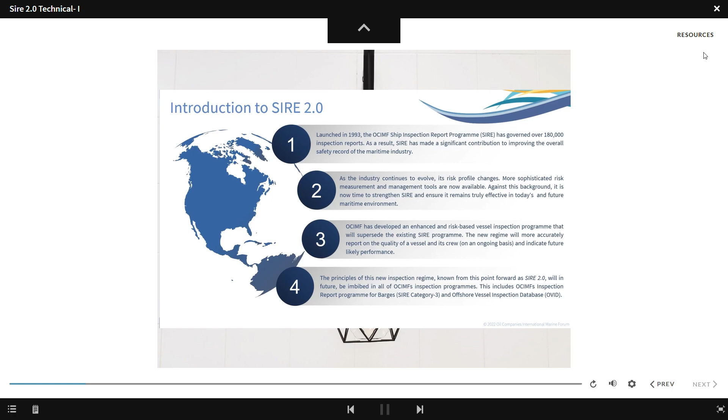OCIMF has developed an enhanced risk-based vessel inspection program, SIRE 2.0, that will replace the existing SIRE program. SIRE 2.0 inspections will provide OCIMF members and program recipients with more accurate information to enable them to make better judgments on quality and likely future performance of a vessel. Over time, the principles of SIRE 2.0 will be introduced in all of OCIMF's inspection programs, including the inspection program for barges, SIRE CAT 3, and the program for offshore vessels, the Offshore Vessel Inspection Database, OVID.

In this module, we will explain the reasons behind the need for change from the existing VIQ 7 inspections to the SIRE 2.0 system. This will bring about the step change that we hope will push the industry towards OCIMF's vision of an industry that causes no harm to people or the environment. We will discuss the 4 key areas of focus and the goal of an enhanced and risk-based vessel inspection program. A brief overview of the SIRE 2.0 question set, as well as a review of the inspection process, will be provided towards the end of this video.

The need for change between VIQ 7 and SIRE 2.0 was influenced by the following factors. 1. Feedback from the industry relating to the effectiveness of the SIRE VIQ 7 program. 2. Many of the questions within the existing VIQ 7 related to hardware. 3. Causes of incidents were not always related to hardware, but to human interaction with the hardware. The human element aspect of SIRE 2.0 will be covered in more detail in their respective modules.

4. Concerns were identified under the VIQ 7 process that it contains too many questions, and that questions were not targeted or focused on specific higher risk areas. Often questions in a VIQ 7 inspection were not completed accurately, and too many were answered as not applicable. 5. Critical operations were not able to be given repeatable coverage. Time management was not always consistent, with some inspectors completing an inspection in 6 hours and some in 14 hours on vessels of a comparable size.

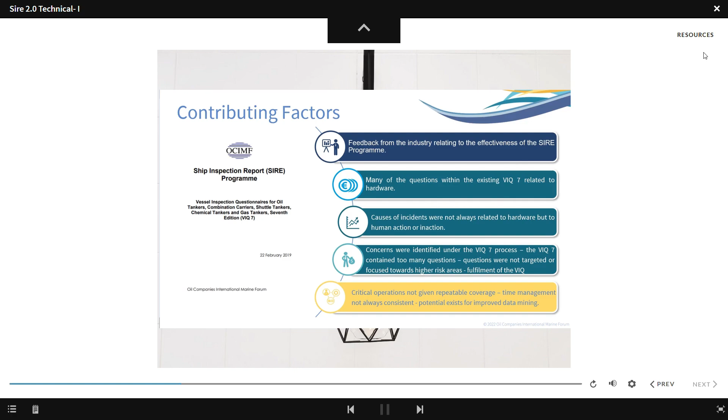SIRE 2.0, a step change. As we mentioned earlier, SIRE was launched in 1993 and has governed over 180,000 inspection reports. As a result, SIRE has made a significant contribution to improving the overall safety record of our industry and has received industry-wide acceptance and participation by OCIMF members, program recipients, and by ship operators. The current SIRE inspection program has concentrated on facilities, equipment, and management systems.

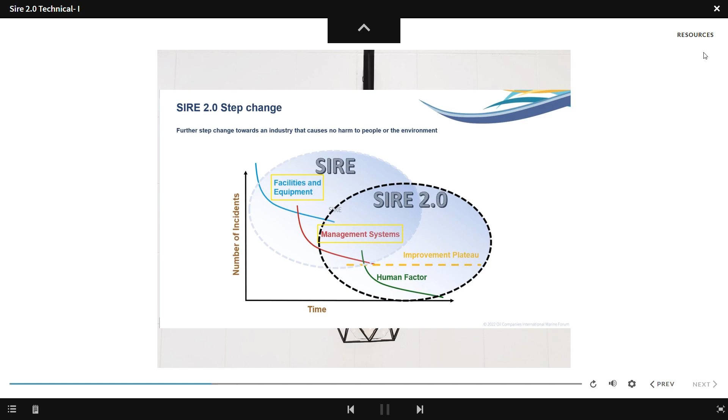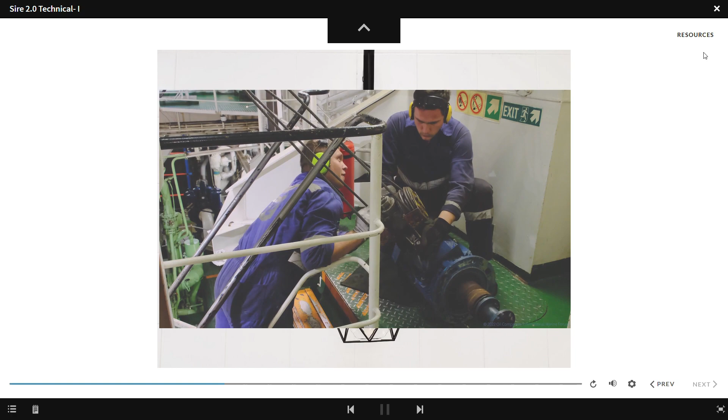SIRE 2.0 introduces a third element to the inspection program: human factors. As you progress through these modules, you will see that human factors is identified as a significant root cause of incidents, and going forward with SIRE 2.0, this will be an element that is identified within observations, along with hardware and process aspects. OCIMF's vision is that this addition of human factors in all its activities will further improve safety and reduce incidents. Let's look at the need for this change.

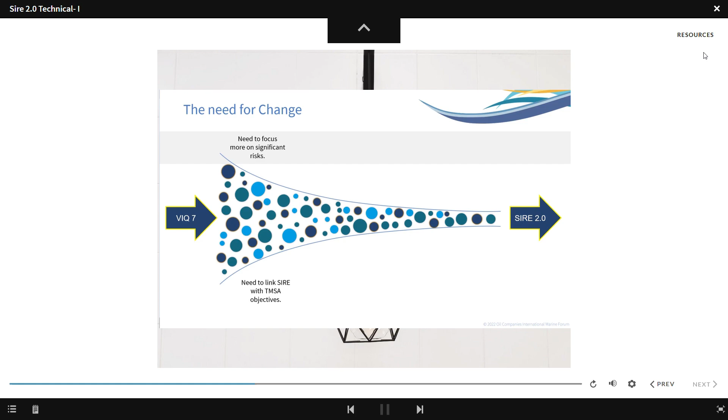In this transition from VIQ 7 to SIRE 2.0, the following key areas were identified and will be addressed, with the aim of an overall reduction in the number of incidents. 1. The need to focus more on significant risks. 2. The need to link SIRE with TMSA objectives and KPIs. 3. The need to respond to technological and regulatory changes. 4. The need to streamline the overall process. 5. The need for inclusion of human factors in the risk-based approach. 6. The need to enhance governance control. These changes will be delivered via the SIRE 2.0 inspection program.

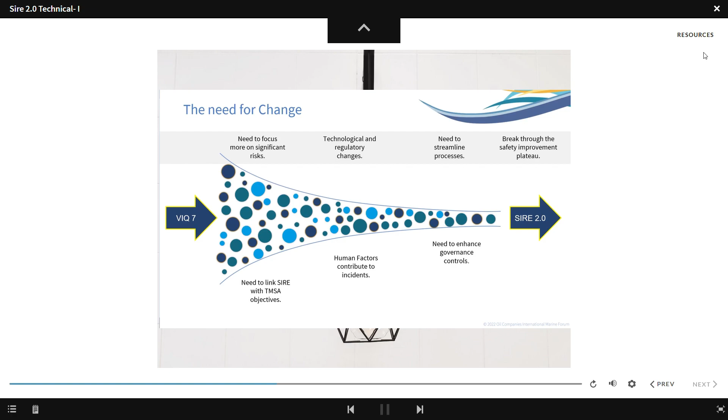The strategic goals and objectives that the SIRE 2.0 program aims to deliver on are identified by the following 4 key focus areas. Accuracy: facilitating an accurate description of how key safety and operational risks are managed and verified on board a vessel. Capability: the training and development of inspectors who are of the highest quality, consistency and integrity. Reliability: a strengthening of vessel inspections and reducing the number of repeat inspections required.

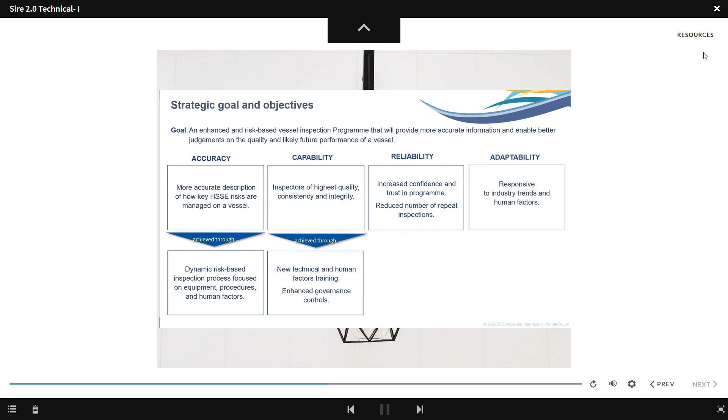Adaptability. A more rapid response to human factors, industry changes, regulatory framework updates, and technology advances. So how are we going to achieve these goals? Enhanced inspection criteria on equipment, procedures, and human factors to further improve control over vessel safety systems and processes. Enhanced pre-inspection processes and more robust monitoring protocols on the inspection process will be included.

Significant enhancements to training and continuing development of inspectors to ensure the highest standard of delivery is maintained and improved. A more comprehensive inspection regime with enhanced tools, strengthened governance processes, and more in-depth reporting outcomes following a risk-based approach. Updated policies, procedures, and user guidance housed in an online process documentation library.

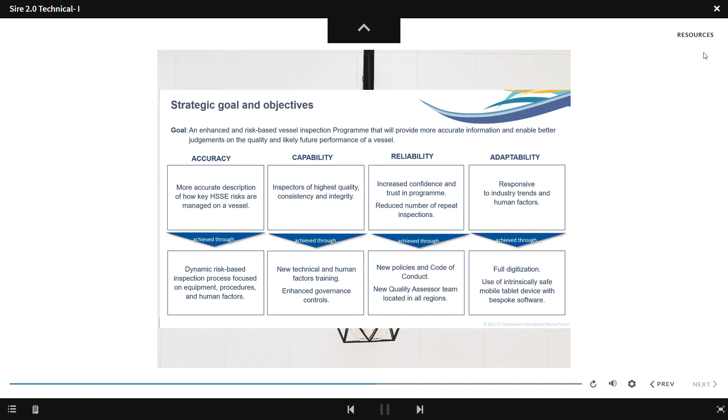An enhanced governance process to provide greater transparency and control for all parties involved in the program, either directly or indirectly, and the adoption of rules that are enforceable and verifiable by OCIMF. The use of web-enabled tablet devices to allow inspections and feedback to be reported and documented in real time, and to allow inspections to be completed more efficiently with the adoption of a comprehensive yet standardized reporting format.

The question set development and review process has been conducted over a 5-year period and has involved numerous stages of approval that has included: 1. A review by the Inspection Working Group. 2. A review by subject matter experts made up of members, auditors and inspectors. 3. A review by the Human Factors Committee. 4. A review by the Legal Committee. 5. A review by OCIMF members. 6. A review by industry representatives. The final compilation and publication were done only after these 6 reviews were completed.

Now let us go through an overview of the inspection process. The inspection request and validation. All inspection requests will be made through the OCIMF portal. Requests will be validated against the program's rules to ensure that only compliant and qualified inspectors are nominated.

The pre-inspection preparation. The inspection template will be populated prior to the inspection from sources of information including vessel particulars, certificates, pre-inspection questionnaire, past inspection observations, port state control data, incident data, relevant photographs and plans. This information will also be available to the inspector before they board the vessel.

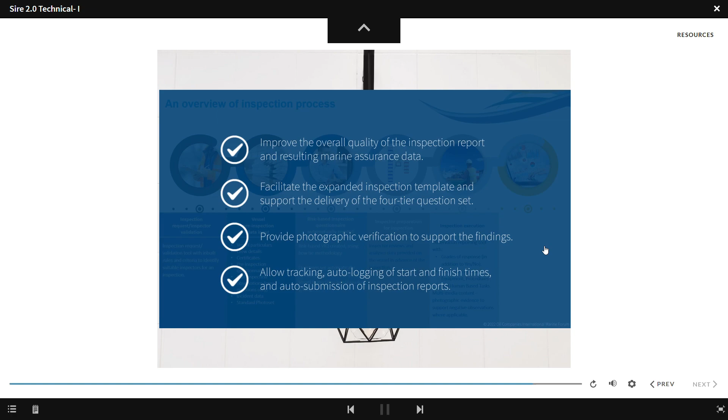Executing the inspection. All inspections will be carried out using a tablet device that is fully compliant for use on board all vessel types. The use of the tablet will improve the overall quality of the inspection report and resulting marine assurance data, facilitate the expanded inspection template, and support the delivery of the 4-tier question set, provide photographic verification to support the findings, and allow tracking, auto-logging of start and finish times, and auto-submission of inspection reports.

The inspection report. When giving a non-compliant observation, the tablet will automatically open an editor that allows a granular assessment of the observations, including a breakdown by equipment, procedures, and human factors. Each inspector will be given the opportunity to assess observations against grades of yes when providing positive observations.

That concludes this video. We have looked at the reasons behind the need for change from the existing VIQ7 inspections to the SIRE 2.0 system, and we have detailed the 4 key areas of focus and the goal of an enhanced and risk-based vessel inspection program.

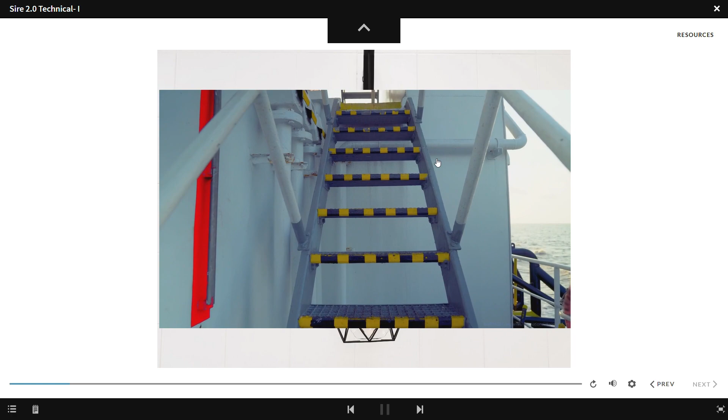The OCIMF Enhanced Vessel Inspection Program will focus on improving and strengthening vessel inspections by implementing a number of initiatives, including a bespoke, ship-specific set of questions for each vessel inspection called the Compiled Vessel Inspection Questionnaire, CVIQ, with all questions applicable to the type of vessel and cargo. Questions answered from a separate hardware, process, human factor, and photographic perspective.

An observation rank of positive, neutral, or negative within SIRE 2.0. The term observation, therefore, means any response entered in a response tool. The opportunity for inspectors to assess and write observations using grades of yes. When writing an observation on non-compliant situations, the editor will allow the inspector to write a granular assessment of the observation, including a breakdown by equipment, procedures, and human factors. Detailed and codified negative observations, allowing for systematic comparison and data mining across inspection, vessel, and fleet.

The ability for the reader of the final report to assess the physical and cosmetic condition of the vessel being inspected, rather than the inspector attempting to make a subjective evaluation of condition during the inspection. This is the primary intention of the photographic question set. A standard set of photographs required to be provided by the operator, which are made available to the inspector prior to the SIRE 2.0 inspection. Information received from the operator is integrated into the system prior to the compilation of the CVIQ.

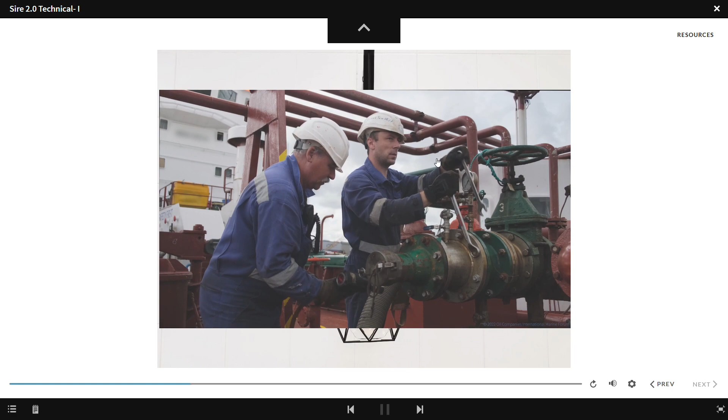Structure of the question's answer options. All questions in a VIQ7 inspection required a simple yes-no binary response, with supplementary options for not applicable, NA, or not seen, NS. The SIRE 2.0 inspection has moved away from the existing VIQ7 question styles, with questions that now require graded responses for hardware, process, and the human factor elements of each question. The inspection also requires the inspector to validate photographs submitted by the operator.

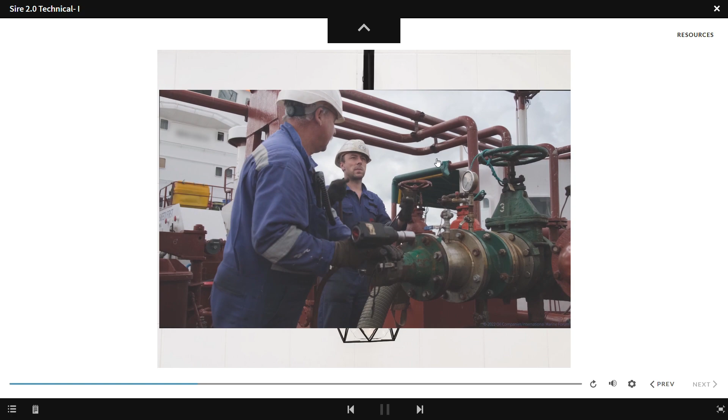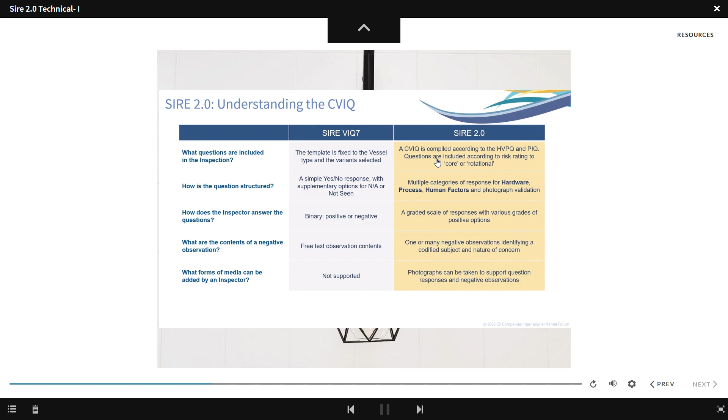Negative observations. Observations made under VIQ7 inspections are comprised of free text only, with no option for the inspector to provide media content. SIRE 2.0 observations identify a subject of concern and nature of concern, and have a photographic evidence function to support question responses. Data provided by vessel operator. In addition to the information provided in the HVPQ, the crew matrix, the PSC, and incident databases, SIRE 2.0 includes the standard set of vessel photographs and pre-populates inspection questions from PIQ information.

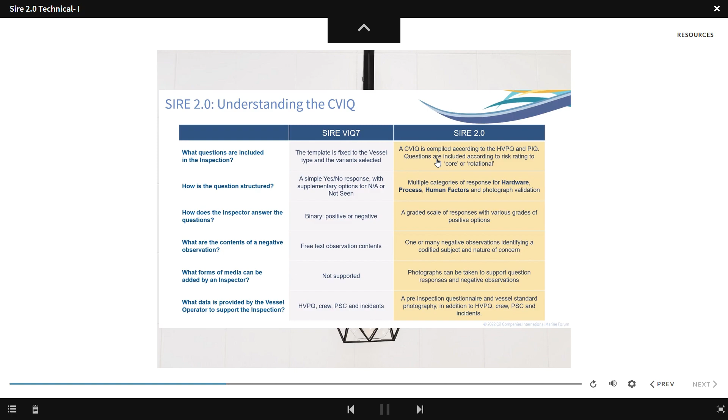So, what questions are included in the inspection? A bespoke question set is created for each SIRE 2.0 inspection and requires the vessel operator to provide information by the following means: the PIQ, the pre-inspection questionnaire; the HVPQ, the Harmonized Vessel Particulars Questionnaire; a standard set of photographs; certificates from a defined list; an inspection declaration, where the operator confirms that all data, photographs, and certificates provided are accurate, complete, and are in accordance with the

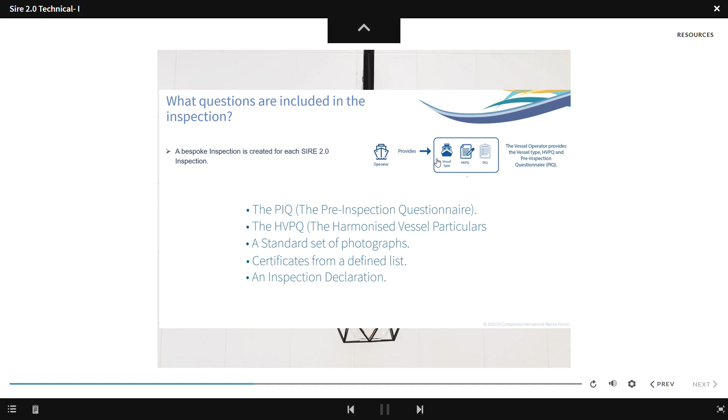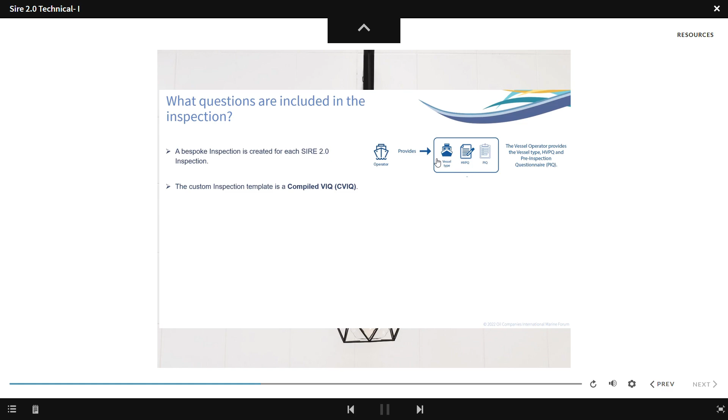instructions provided. Based on the information provided, the inspection compiler creates a unique ship-specific inspection questionnaire, the Compiled Vessel Inspection Questionnaire, CVIQ. The compiler assesses the vessel type and its inspection history, and then selects questions from the question library based on their risk ranking. All questions require responses on the hardware, process, and human factor elements. These responses will be graduated and supported with documentary evidence.

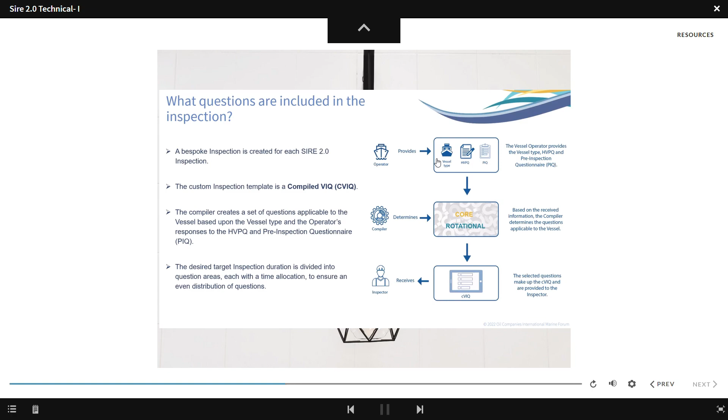The CVIQ and the information provided through the pre-inspection questionnaire are downloaded to the inspection editor on the inspector's tablet. The expected duration of a SIRE 2.0 inspection is spread over the different areas of the vessel to ensure a balanced allocation of questions for each area. A risk-based vessel inspection questionnaire is generated consisting of bespoke, risk-based vessel inspection questions using the bow tie methodology of risk assessment. Questions are comprised of 4 different types.

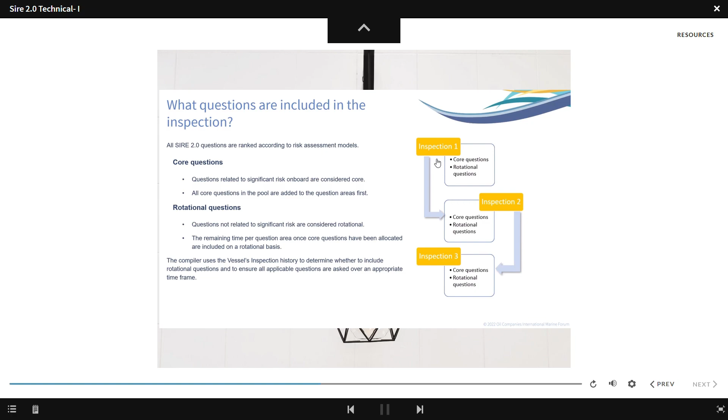Core: the questions required to satisfy members' fundamental risk assessment criteria. Rotational: the compiled questionnaire ensures that all non-core questions are covered over a period of time, and that each inspection template is designed for a defined duration. Conditional: specific questions based on the available data on the vessel, the operator, or the ship type. Campaign: questions based on areas of specific focus that may be identified by OCIMF and its membership and are applied over a limited period.

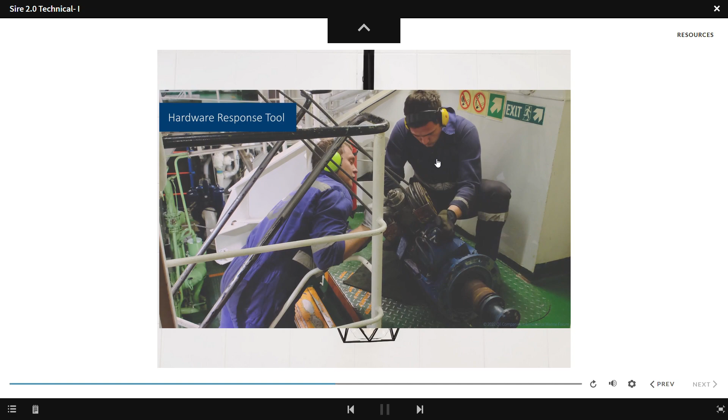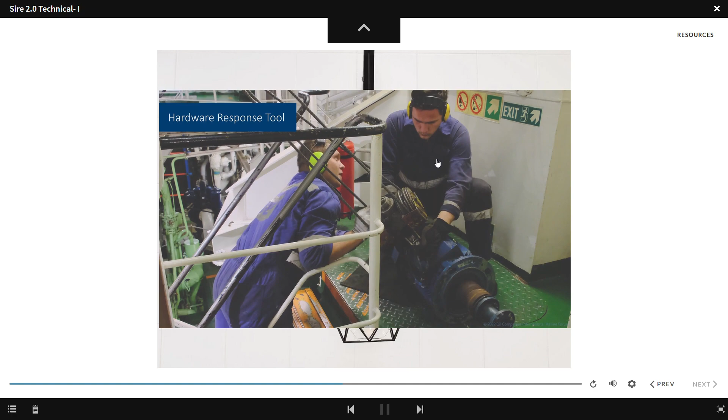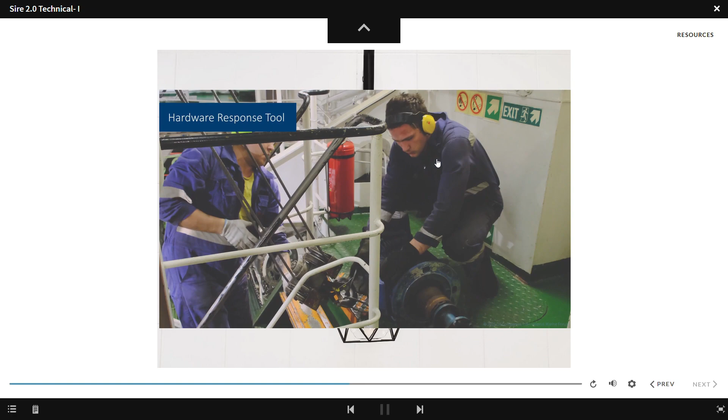Let's look at how the questions are structured. Each question is assigned one or more response tools to record the outcome of the inspection activity related to the top-level question. Hardware response tool: where a top-level question or supporting guidance refers to vessel structure, machinery, outfitting, or equipment, the hardware response tool is assigned. In most cases, the hardware response tool assigned is binary, since if vessel structure, machinery, outfitting, or equipment inspected under the scope of the top-level question is found to be deficient in any respect, the response is usually negative.

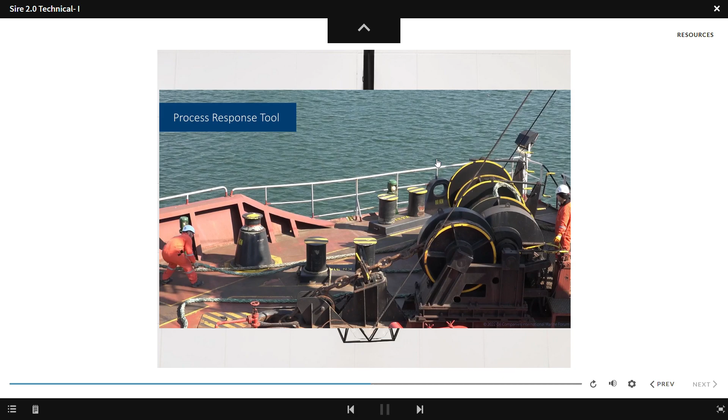Process response tool: where a top-level question or supporting guidance refers to a vessel procedure or documented process, the process response tool is assigned. There are questions where the guidance requires a binary response against a process-based question. In these cases, the response should be based on the top-level question being answered and the instructions provided in the guidance. Most questions that refer to vessel procedures or documents present require a graduated response.

Human Response Tool. The Human Response Tool is assigned where a top-level question or supporting guidance refers to the familiarity of vessel staff with a company procedure, process, or with the use or operation of machinery or equipment. Inspectors will consider whether the underlying task or activity was performed in an appropriate manner that is in accordance with company procedures, operating instructions, and/or industry best practice.

These response tools may be programmed to require either a binary or a graduated response by the inspector. Where a binary response is required, the well-established SIRE yes-no convention is used by providing two options which are phrased to indicate yes or no within the context of the response tool. Where a graduated response is required, specific guidance is provided for each type of response tool.

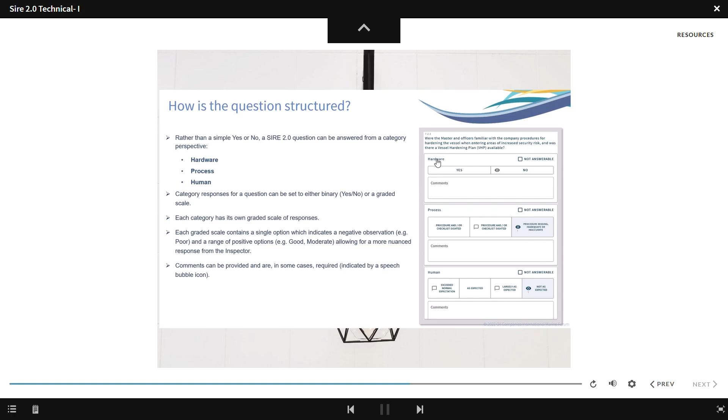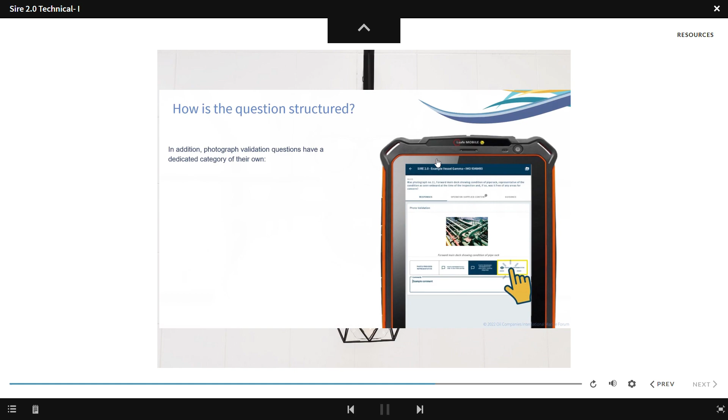Continuing with the structure of the questions, let's look at what a photograph comparison response tool actually is. Where a top-level question refers to one of the standard photographs provided by the vessel operator prior to the inspection, a photograph comparison tool is assigned. The intention of the photograph questions is to allow the reader of the final report to assess the physical and cosmetic condition of the vessel being inspected, rather than the inspector attempting to make a subjective evaluation during the inspection. If the photograph is not representative of the general area, the inspector will provide photographic evidence along with any comments or observations, highlighting the actual condition of the area represented by the operator-supplied photograph.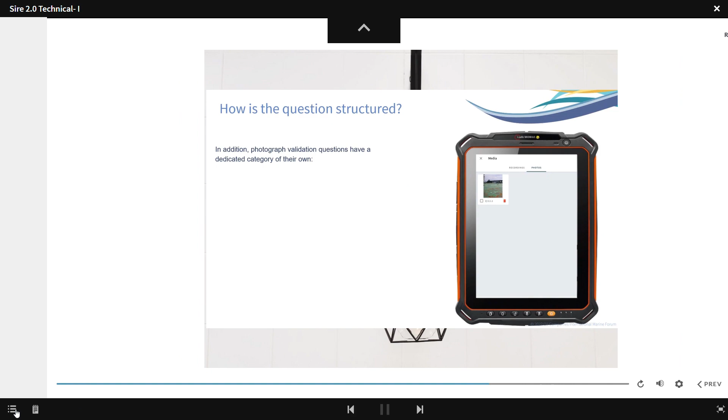The contents of a negative observation. A negative observation made in SIRE 2.0 is a combination of a subject of concern and a nature of concern. Subject of concern, SOC, is a term used within the inspection editor application to identify what is being reported on. Nature of concern, NOC, a term used within the inspection editor application to identify what has been observed. The use of the Ex-proof tablet allows the inspector to take and provide photographic verification to support their findings. This use of the tablet will be subject to terminal vessel approval.

The photograph repository. The vessel operator uploads a defined set of photographs of the vessel to be inspected. These will be used for condition verification by the inspector during the inspection and will be included in the final report for the information of the report recipient. Vessel certificates. The vessel operator uploads vessel certificates applicable to the inspection process from a defined list. The certificates are available to the assigned inspector through the inspection software before the inspection.

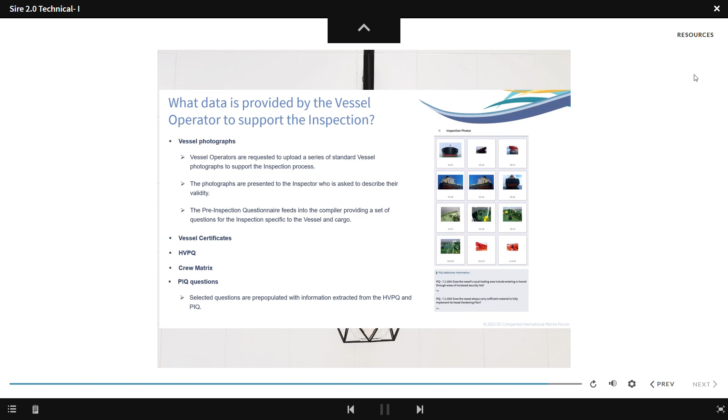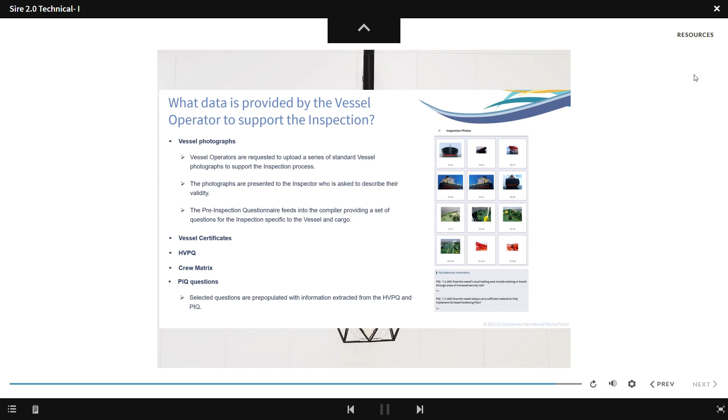Pre-inspection questionnaire, PIQ, an online questionnaire completed by the vessel operator that provides information about the vessel and supplements the information provided in the Harmonized Vessel Particulars Questionnaire, HVPQ. The PIQ is used to gather dynamic information about vessels' operational history and additional static data. This permits the inspection compiler to assign questions when building a bespoke inspection questionnaire for the inspection. Some of the information gathered through the PIQ is inserted into the inspection editor and the final report as information for the inspector and report recipient respectively. The PIQ is not available as a standalone document.

In this module, we have looked at benefits of SIRE 2.0 to the industry, differences between VIQ7 and SIRE 2.0, what questions are included in the inspection, how the questions are structured, contents of a negative observation, operator-supplied content. This brings us to the end of this module, which has briefly introduced us to the components of the SIRE 2.0 inspection. Further modules are available that cover other aspects of the SIRE 2.0 program.